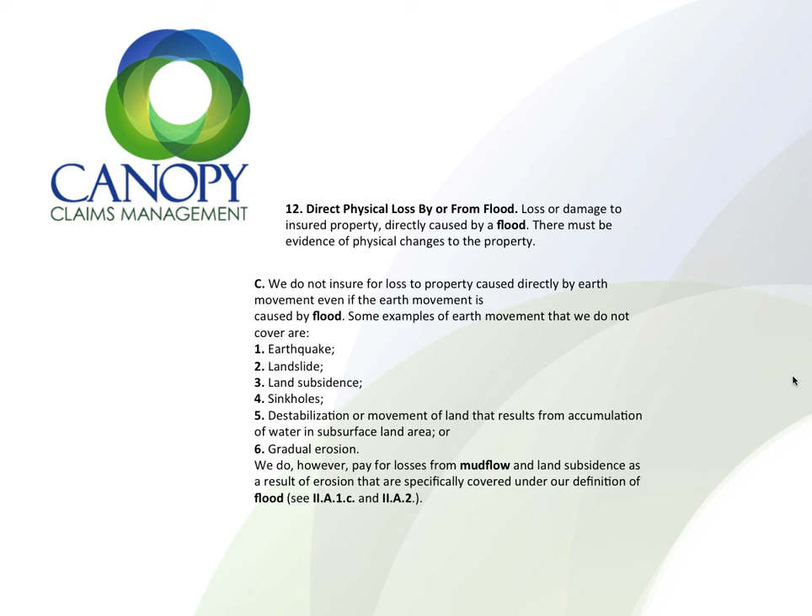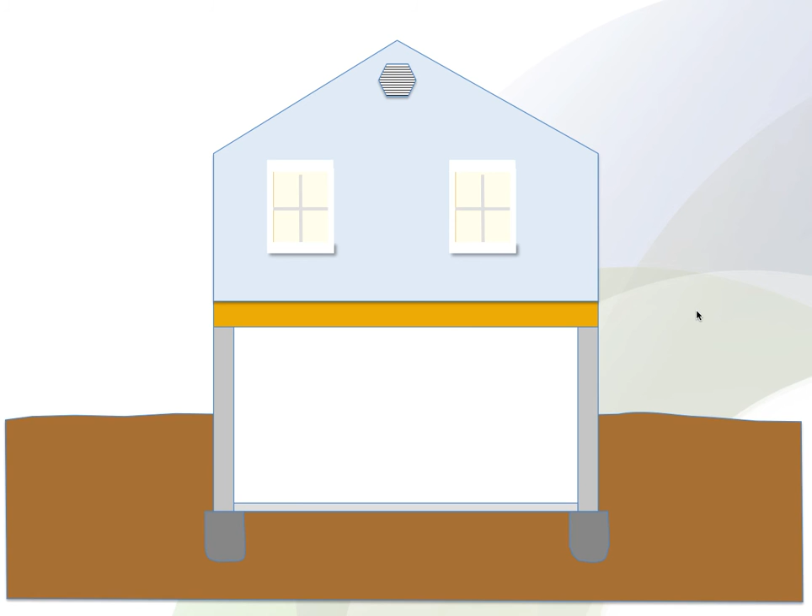So let's begin. If you take a typical home construction of footings, a slab foundation with a basement and a sill plate or your joists in your home that sits on top of it, and that was here before any storm or anything like that. And basically what we did is we had storm water that came in. Keep in mind, this water did not come from the earth. It wasn't an inundated ground, or if it rained for 10 days straight and the ground just couldn't take water anymore and it exerted pressure from below.

This was a storm surge. The water was in the ocean, and the winds, which caused the storm surge, pushed the water up on land, and it went across land, across the streets, across everywhere, and wrapped around your house, and then started filling your basements. Before it started filling your basements, the water was on the outside and not on the inside.

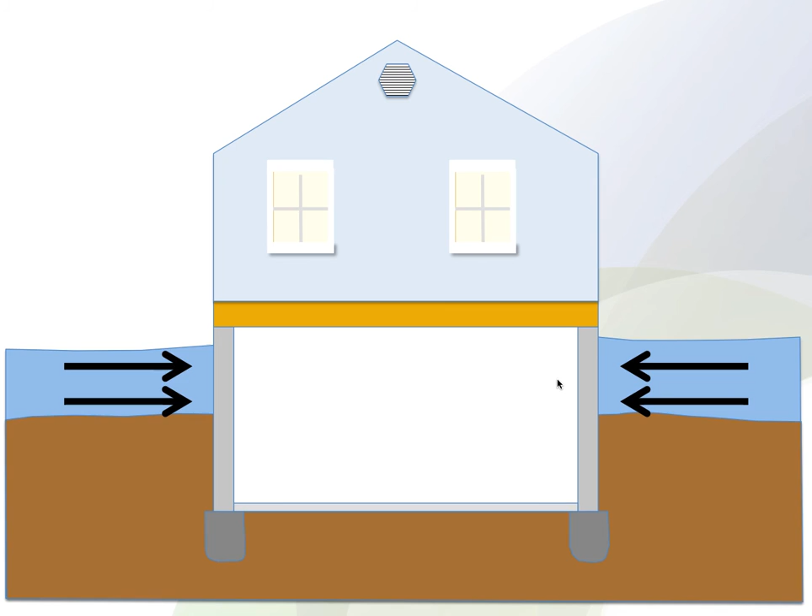Now this water, or your foundation that held water before, so you had a bunch of torrential downpours, or you had a bunch of damage where you never had water in your basement, now all of a sudden you're putting a lot of water pressure, and that's what our direct physical damage is. It's from direct pressure from water.

So what you basically have in certain situations is you have basement walls that caved in. You have basement walls that cracked. The cracks could be big, they could be small, but what happens is there's pressure on the outside of the foundation that exceeds what the foundation can handle. Tiny cracks that were there before that may have been watertight are now exacerbated and now let water in, and they become bigger cracks.

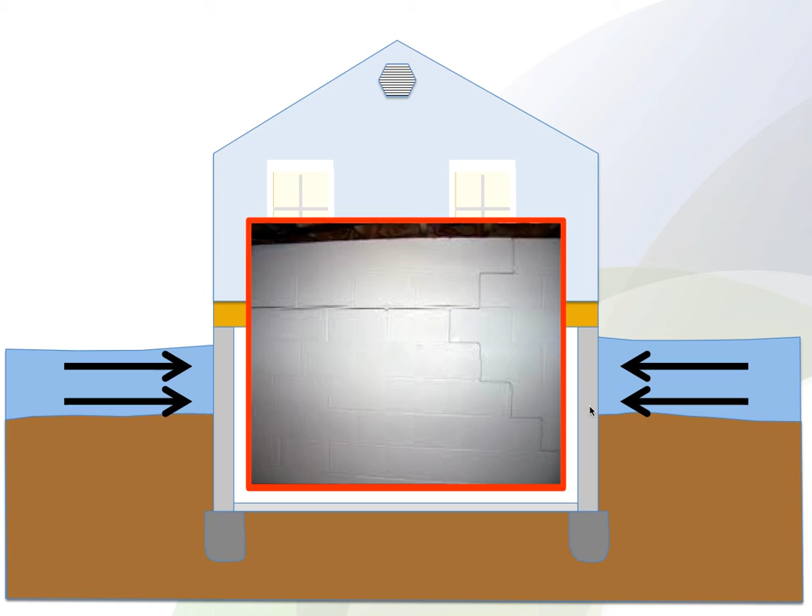Now, FEMA, the NFIP flood program, they know this happens. This has been happening for years. What they did is, in new construction codes for communities that are participating in the NFIP program, they have changed the building codes to include these flood vents. So if anybody's rebuilding from Sandy after the fact, a new building, they have to put these flood vents in.

And what happens is, if the flood vents were in place prior to Sandy, when the surface water surrounded the house, it would have filled the basement basically at the rate that it was surrounding the house, and there would be no extra pressure on the foundation. That's the purpose of these and breakaway walls and vents in this manner.

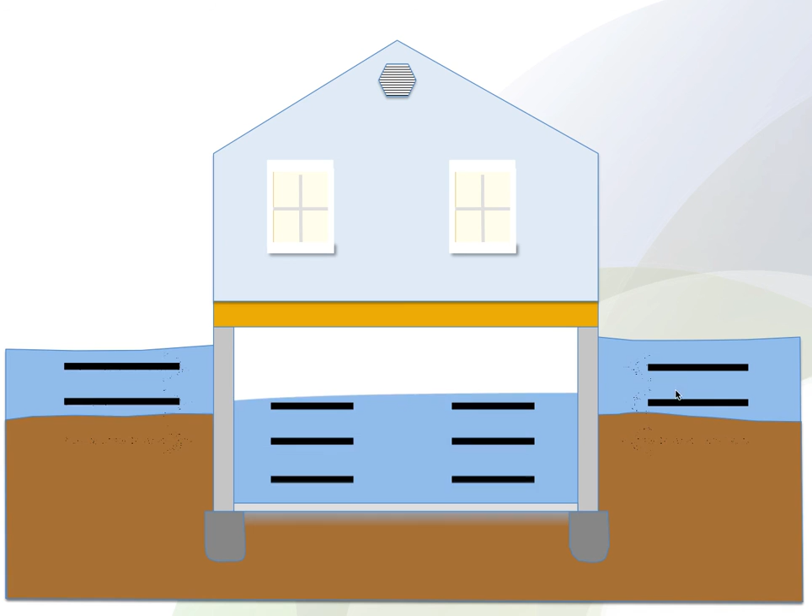So what happens is you have your outside water that starts to seep in the cracks, the new cracks or any openings, and now your basement fills with water. It equalizes with the water that's outside, and now you pretty much equalize the pressure. For the purpose of this video, I'm saying you equalize the pressure, but currents add additional pressure. But because there's water on the inside, it really doesn't put too much stress on a foundation.

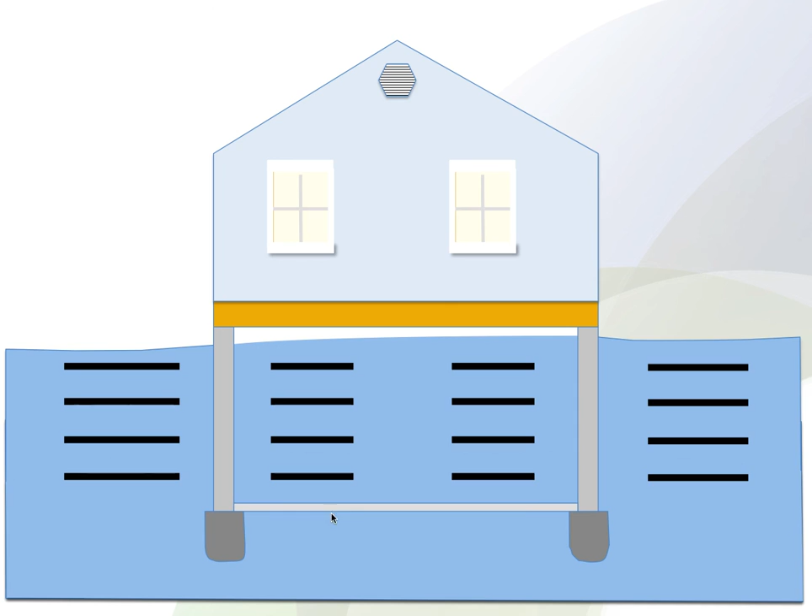But what you have is a foundation that's already stressed from the pressure that was exerted on it before the basement filled with water. So as the ground inundates with water, everything's pretty much equal. Then what happens is the water on the outside goes down, but it's still high on the inside because there are no flood vents. There's no doors. There's no place for it to go out. Now what we have is pressure pushing on the outside walls. Keep in mind that 1 cubic foot of water exerts 64 pounds of pressure.

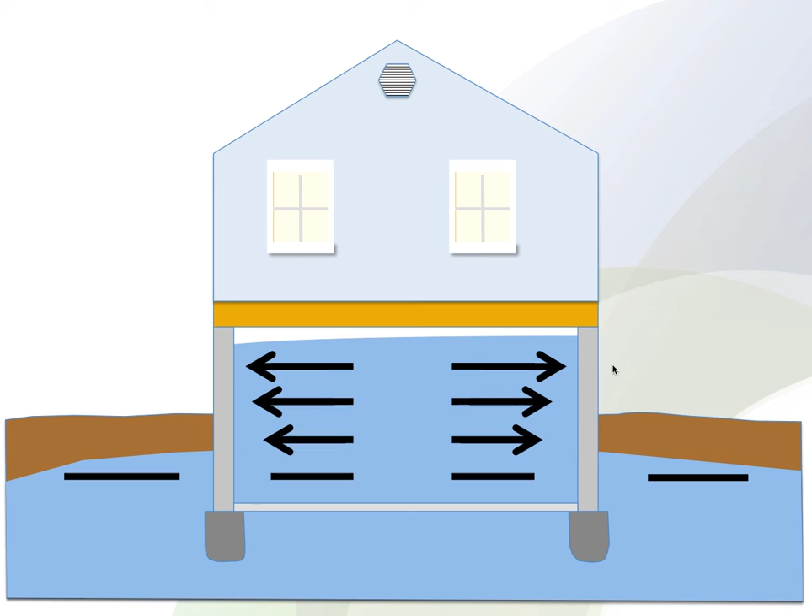So just imagine how much pressure water is putting on the foundation, pushing it out. So in this case, you have pressure pushing in, you had it neutralized, you have pressure pushing out. What's pushing out? The water's pushing out on a foundation that's now already compromised. So that water goes down, everything goes down, and you're left with a damaged building.

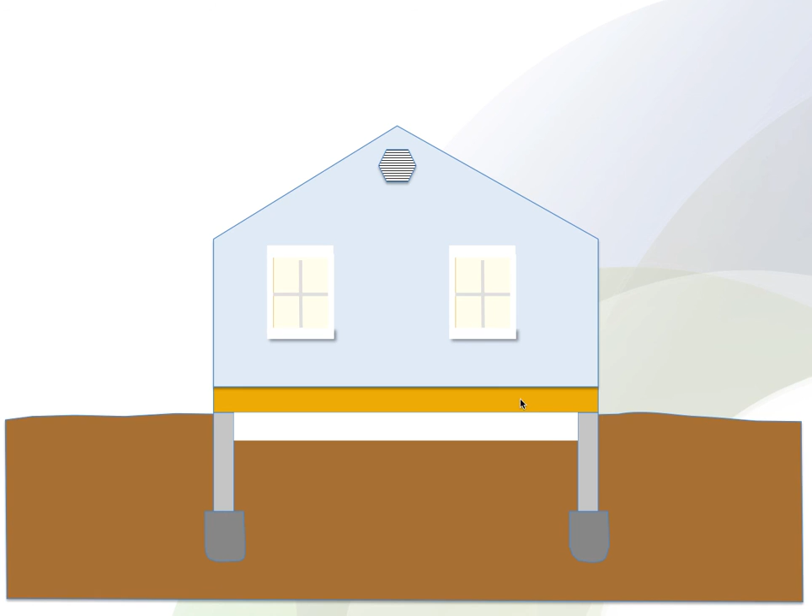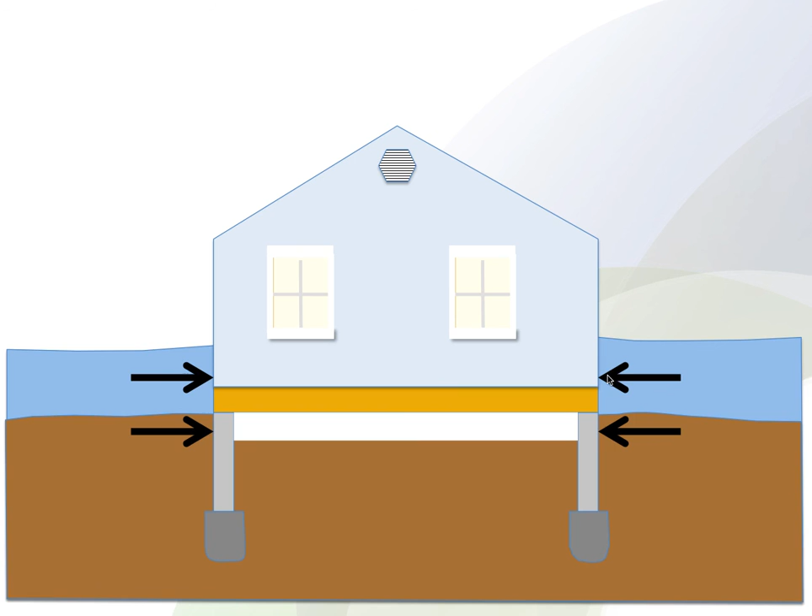For homes that don't have basements, where you have foundations, another thing happens. It's not just pressure on a foundation wall, but when the water comes in, it exerts pressure on the actual components of the building. It exerts pressure on the siding, on the sheathing, on the framing. It exerts pressure on everything pushing in.

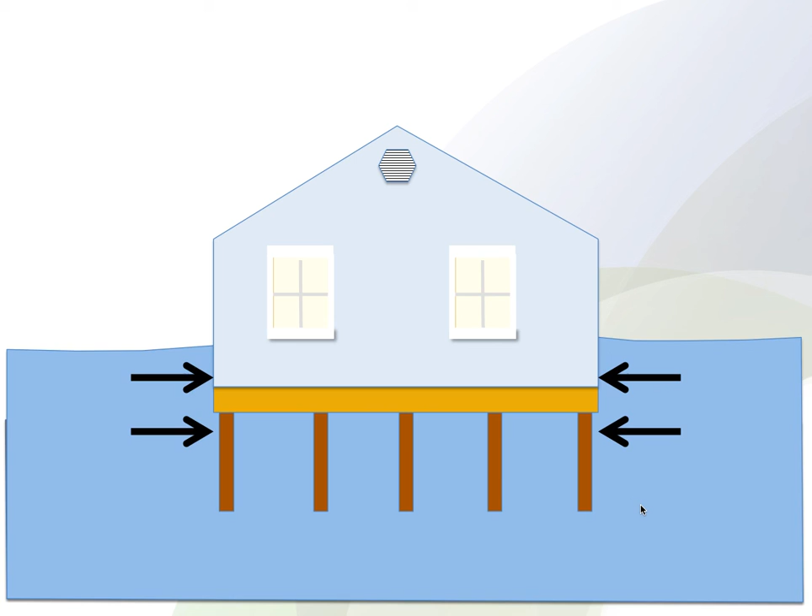On a house that's on pilings, what happens is the water comes in, it's exerting pressure. Same way. There's no water on the inside yet, so it's exerting pressure on everything. The action of the waves or the surge or the currents that are going through are all over the place, and they shake your foundation, they shake your house, and you wind up with, basically at the end of the day, an affected property.

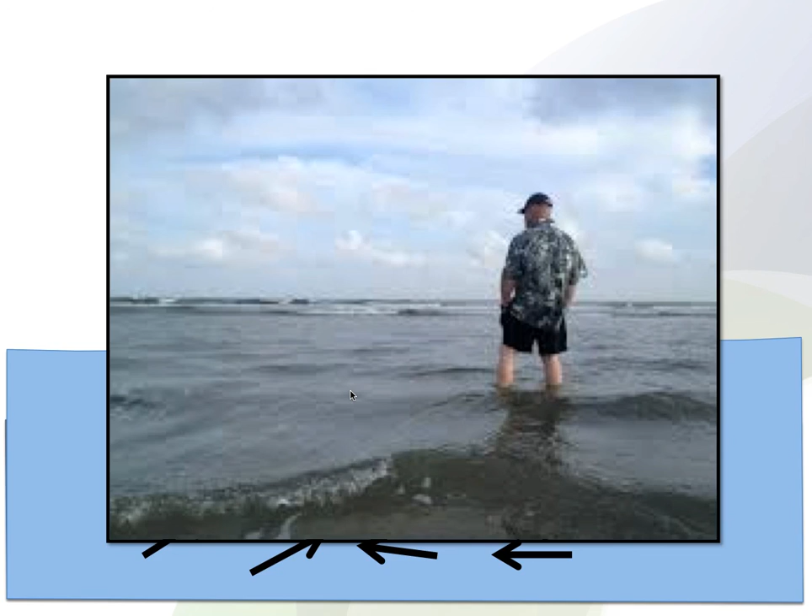If you've ever stood in the ocean, why do we grab our kids and we don't let them go in up to their waist in the ocean? It's because they'll get washed away. So if you've ever felt not waves, not a storm surge, but just stand in a foot of water in the ocean and feel the current coming in and out and what pressure that is, imagine an entire house. Your legs are not big in diameter. Imagine a whole wall with that pressure pushing on it.

So basically, your water goes down, and what you're left with is not reconsolidation of soil, not land subsidence, not erosion over time, not settlement. You wind up with pilings and a house that's racked and shifted solely from water pressure.

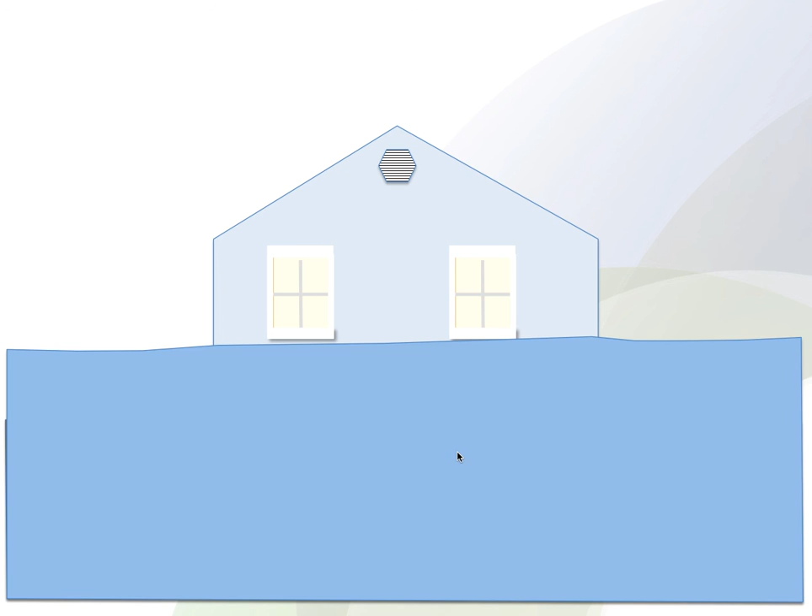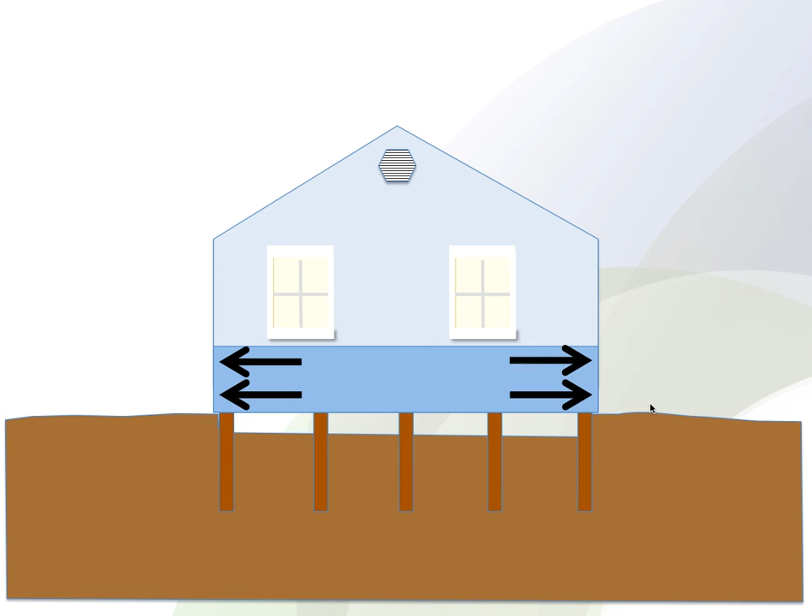Now, going back to the water being high, when it goes down, it's still in the house. It hasn't come out yet. It went down on the outside faster than it went down on the inside. And now what you have, just like in the basement, is you have water pressure pushing out. So the water's high on the inside, it's low on the outside, and now you have pressure pushing out.

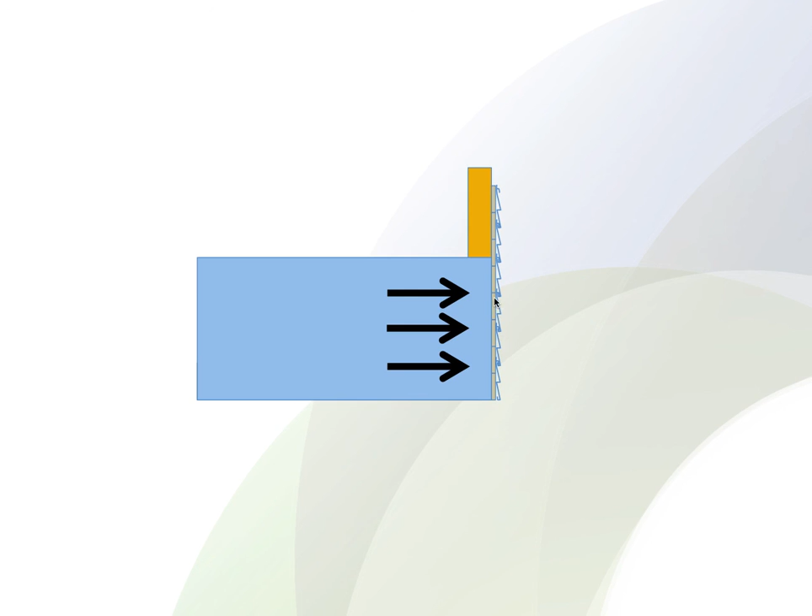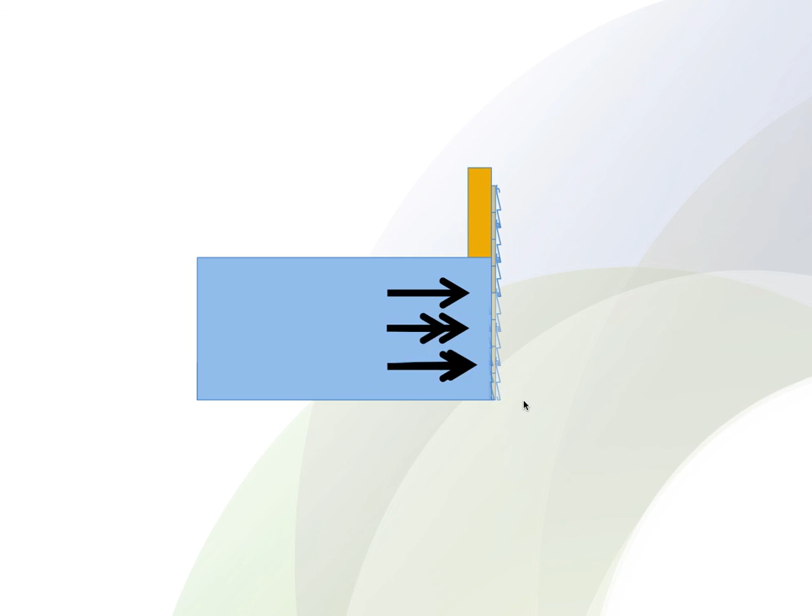Now I'm going to give you a close-up of that. The water goes down on the outside. You now have pressure pushing on the inside. It has to get out. So you have your framing, you have your sheathing and your siding, or multiple layers of old siding with new siding on top of it. Either way, the water has to get out. And it's thousands of pounds of pressure. So what happens is the water pushes and your siding gets pushed out.

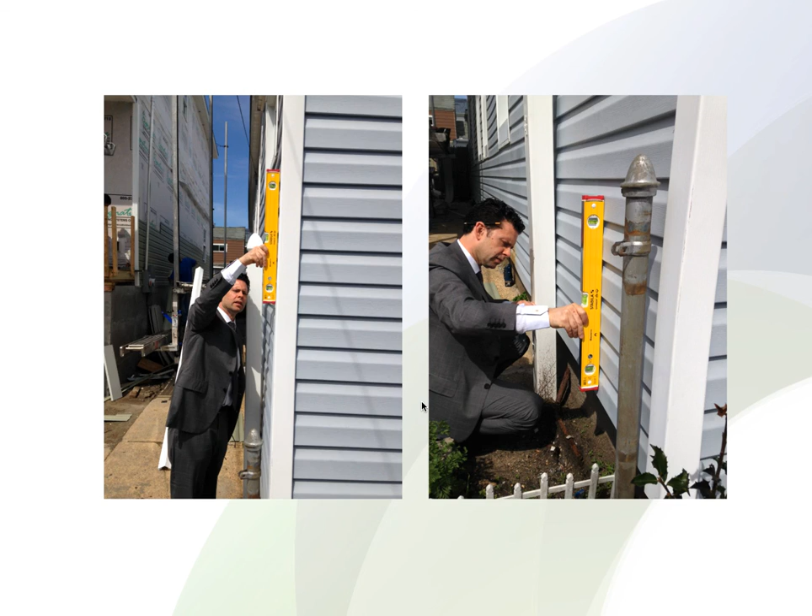So this is an example of a building where you can see the post. The post is not level because you can see down at the bottom here that the pressure from water on the inside coming out of the house was so great that it pushed the siding, pushed the sheathing, pushed everything that's behind this wall out just so the water can get out. It actually moved the pole. This is the wall that we're looking at.

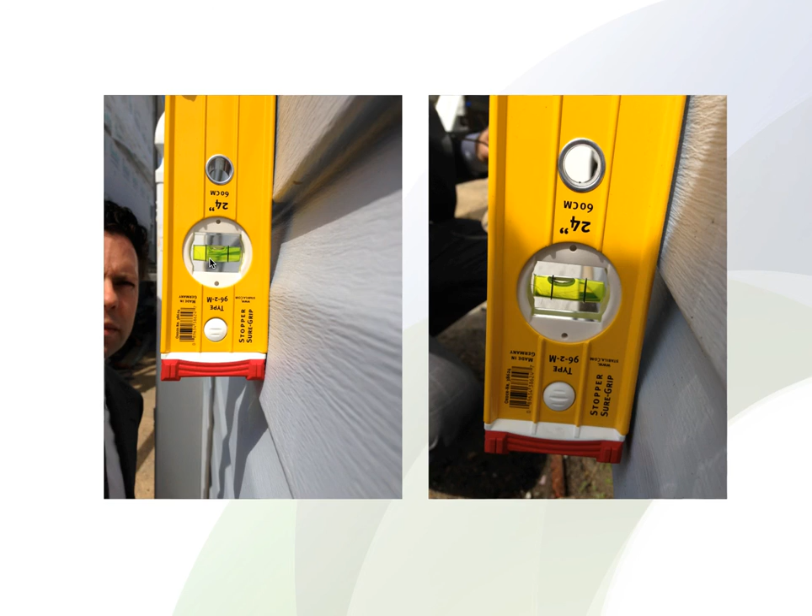It's hard to photograph these types of differences, but here's the wall at the top, near the top of the post, and lower where the wall is bowing out. And these are the level marks. You can see the bubble right in the center of level. So you have a level house above it, and then below you're out of level because it was pushing out.

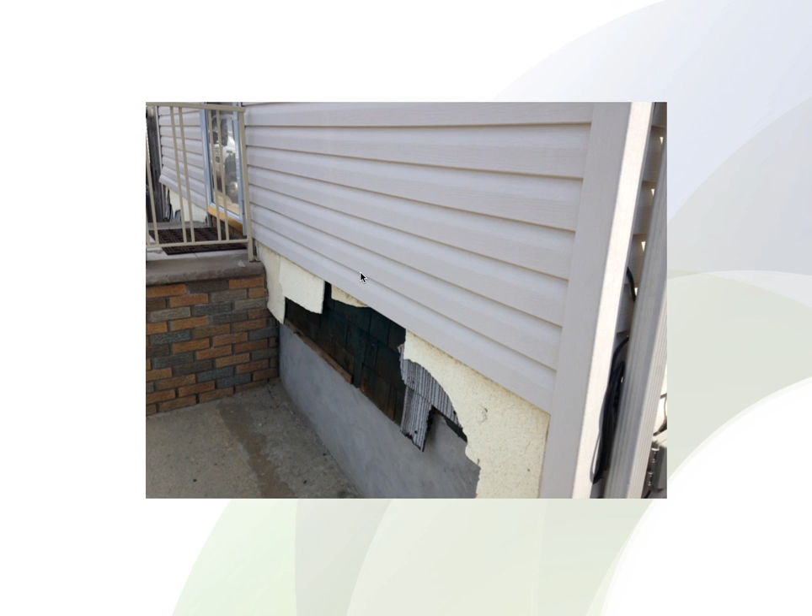This is an example not of that house, but another house where you can see where the water line was about here, and you can see when the water was coming out that it pushed out. And this is the inside cavity of the wall. So there was sheathing, like a planking sheathing. There was tar paper. There was old tar shingles and insulation and siding. And basically all this got pushed out, and that's what came out of there.

So what happens: take a small bungalow, and let's say it's 20 feet by 48 feet, which is a 960 square foot bungalow with 3 feet of water in it, amounts to 2,880 cubic feet of water. Times 64 pounds per cubic foot, you have 184,000 pounds of pressure on the inside of a building trying to push out. That's direct physical damage, not land subsidence, not any of the other things.

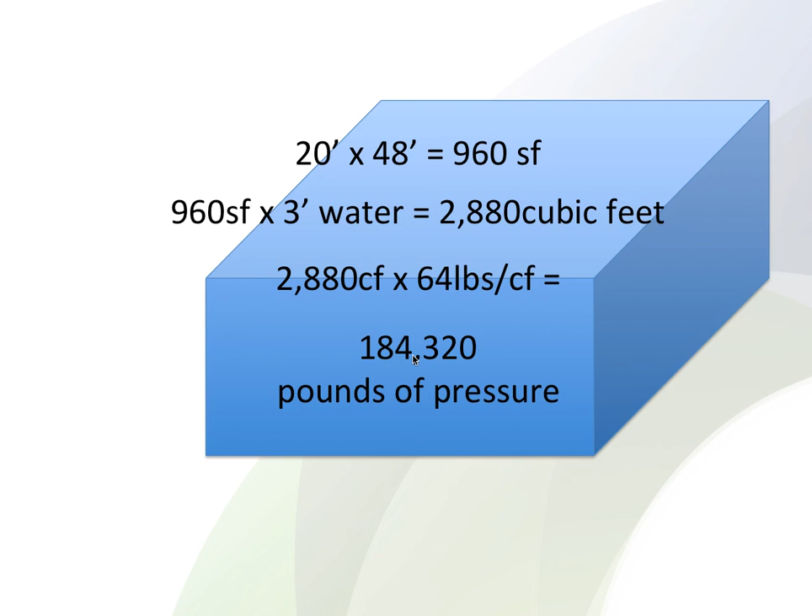It is just water. Imagine the hundreds of thousands of pounds of pressure pushing in on people's foundations, pushing on their pilings, and pushing on their basement walls. So that is the conclusion of the Write It Right estimating series, foundation damage, hydrostatic pressure.